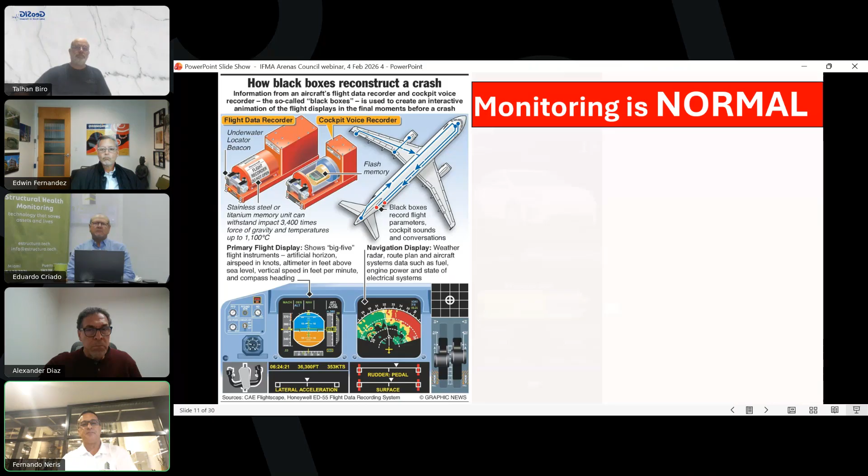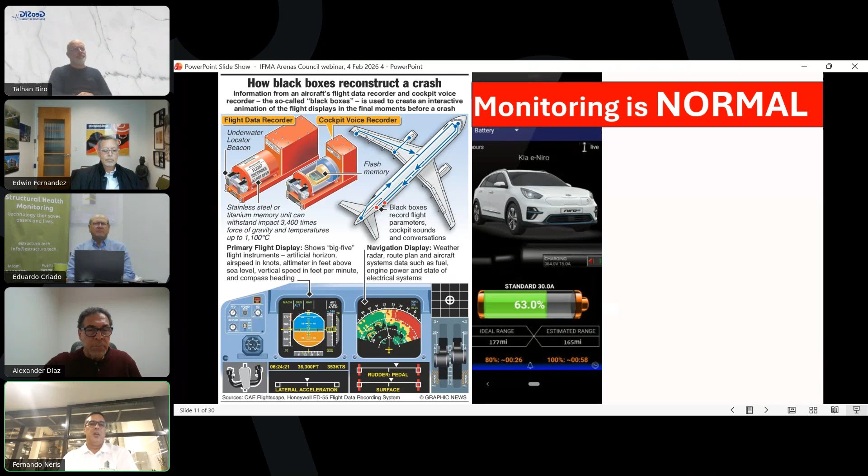And then automobiles, the same with automobiles. You're driving your car to the grocery store or on a vacation with your family. You want to make sure everything is good. Your tires, your oil temperature, water temperature. These cars are now monitoring everything that's going on. And why do you do that? You want to be safe.

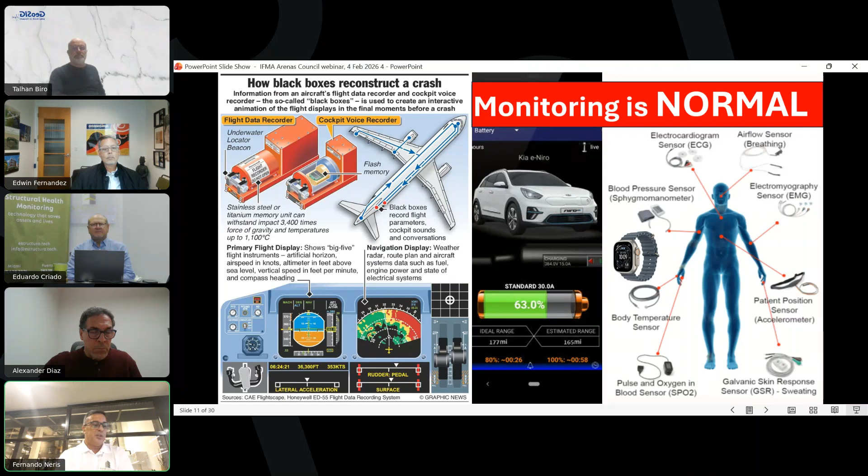And now us humans, we all wear watches. We have rings. They detect oxygen levels, stress, your heart rate. Why? Because you want to maintain your health, you want to be healthy and last longer. So what we want to introduce to you is that we do have a way of monitoring one of your biggest assets, your venues, your buildings, your bridges, dams, and practically any type of infrastructure. So that's what we're presenting here.

And then here's a video of our capabilities.

Can you guys hear the volume? No, we can't hear the volume. Give me 1 second, folks. This is Kylie, let me see if I can make the sound work. Give me 1 second, please. Thank you. Okay, I'm going to try one more time to restart the video and see if the sound works, okay? Let me know.

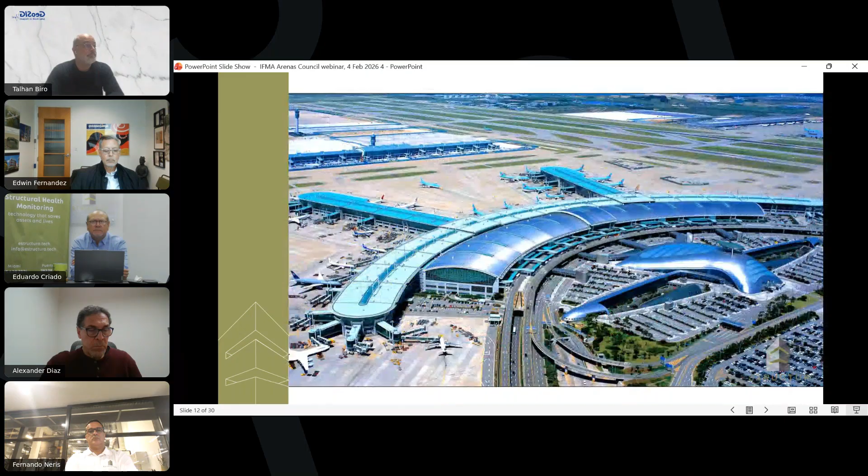Delivering modern technology to the Americas and Caribbean that has been used extensively around the world for over 30 years. This technology is a call to action for our aging infrastructure. Structura has the privilege of being chosen as a platinum partner to the world-renowned GeoSig, a Swiss technology corporation. GeoSig provides structural health monitoring equipment for new and aging structures, from residential to commercial buildings, bridges, dams, railways, government facilities, hospitals, hotels, historical landmarks, mines, airports, nuclear power plants, and scientific equipment across 7 continents and 60 countries.

Structural health monitoring utilizes sensors to detect an exceedance of allowed performance while identifying and verifying structural behavior. GeoSig's revolutionary Swiss technology provides immediate response, with each sensor having a minimum sampling rate of 50 samples and calculations per second. You truly get a real-time view of the structure.

With such a high sampling rate, the system responds immediately to any changes in the structure. Notifications: audio and visual alarms can be installed inside a structure for occupants, and email notifications can be sent to management when critical changes in a structure are detected. These urgent notifications can literally save lives.

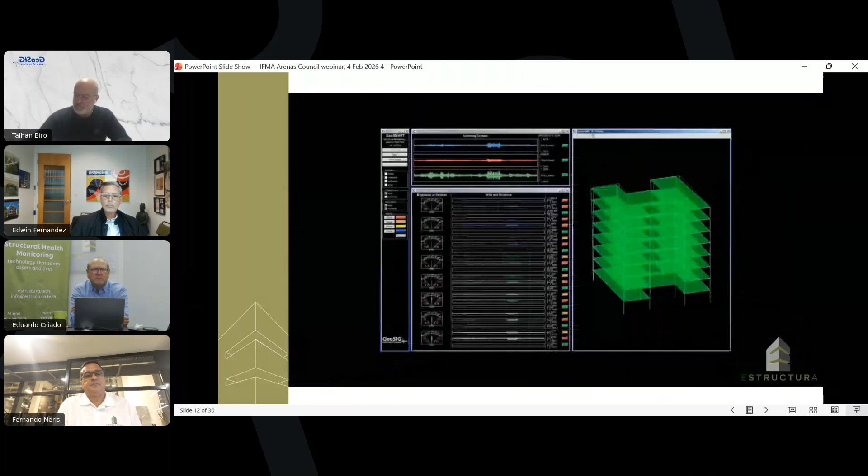Building integration: our equipment can be tied into building management systems so that responses to structure change can be customized to turn off at-risk critical services like utilities and elevators, or open electronically locked doors for ease of evacuation. Reduction of repair costs: early indications of potential damage allows for predictive maintenance versus preventative or reactive maintenance, lowering costs throughout the life of the structure and potentially extending the life of the structure itself.

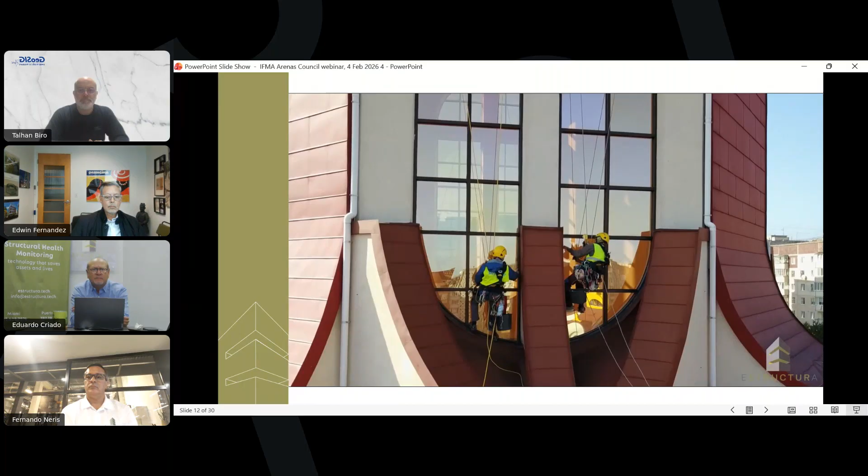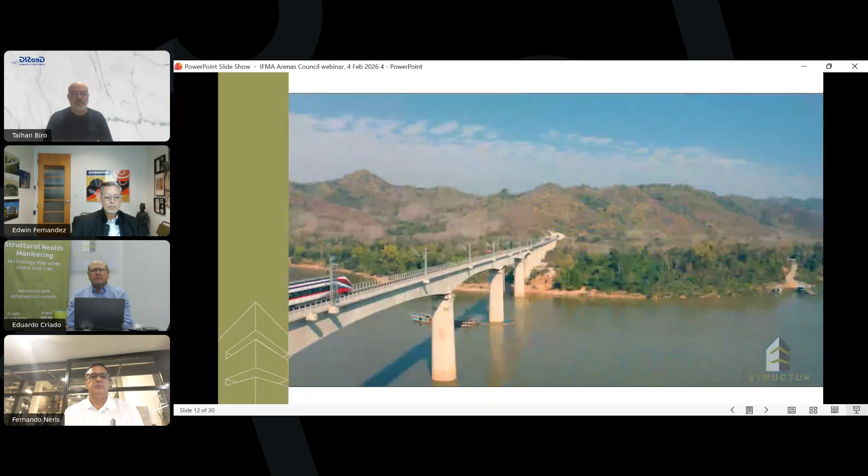Mapping of multiple properties: properties with multiple structures like schools, hotels, and residential or business campuses can be monitored on a single system from anywhere in the world. Satellite comms and solar backup: GeoSig equipment and software can protect even the most remote locations via always-on satellite connections and solar power generation.

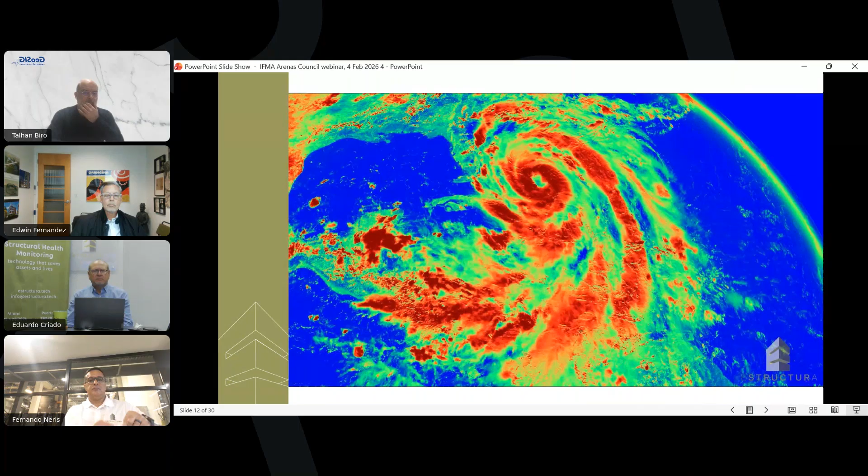These satellite connections also serve as a backup for critical infrastructures like hospitals when threats like hurricanes and earthquakes are ongoing. Conclusion: as Florida wrestles with mitigation strategies to avoid another building collapse like Surfside, Estructura's tools provide continuous data on structures subject to the effects of sea level rise, especially in highly salt-prone coastal regions. Even lapses in governmental inspections, or simply the natural passage of time, can play a role in structural safety, so it is imperative that owners and residents utilize every tool available to them.

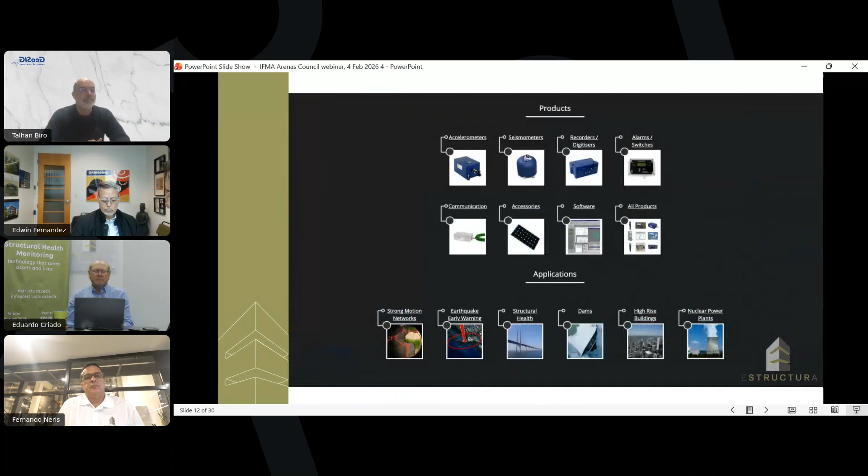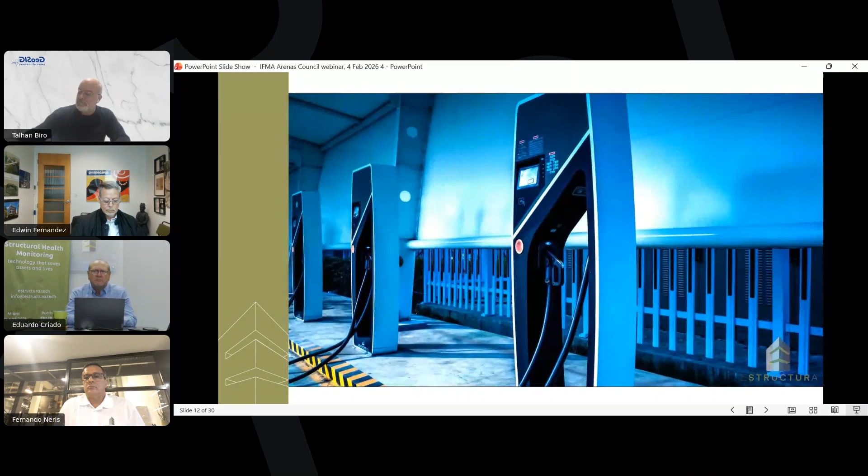For example, emerging research has noted that electric cars are about 50% heavier than traditional gas-powered models. As electric vehicles become more prevalent, they will pose a direct structural threat to both multi-story and underground parking garages. Estructura provides our clients peace of mind with custom solutions that offer an affordable way for commercial and residential customers to reduce risks, lower costs, avoid disasters, and save lives.

So basically, we wanted to also inform you that we have a collaboration agreement with TerraIntel. Dr. Manu, who is a world-renowned scientist, works with subsidence of the soil and the ground. He's got access to satellites that have been up since I believe 2022. They are constantly surveying the entire Earth.

So we've been able to consult with him, with our clients, to not only give us a history of how the structure has been behaving, but also the ground around the structure, so that you as an owner or a manager can use this data with your consultant and figure out if the subsidence is part of what's causing the problems with your structure, or if it's not, or if there's something else that we have to look at and help.

So we're trying to be a one-stop solution for you as a client to help determine if there's anything wrong with your facilities. So before a disaster, we could give you all the information. During a disaster, let's say if it's an earthquake or hurricane or a tornado, we could tell you if the building or the structure is fine for occupation, or if you have to shut it down.

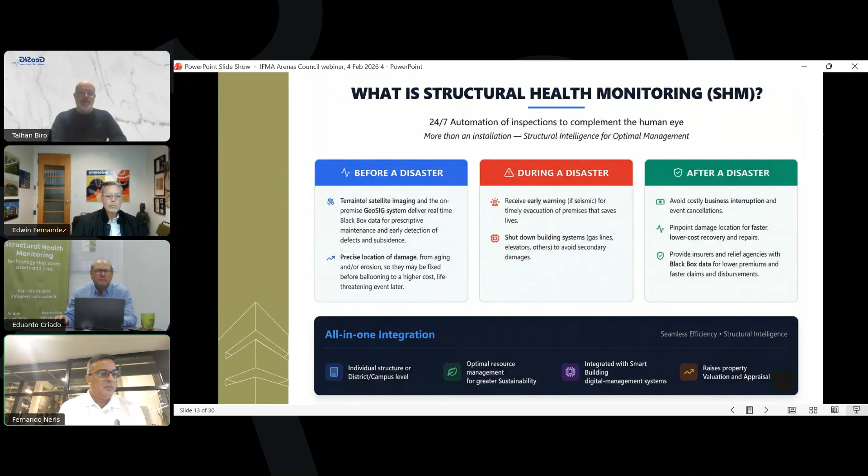Next one. Yeah, so with TerraIntel, as you can see here on the slide, we could help you with multiple structures and facilities, especially stadiums and complexes. At the end, I will show you a case study of the Coliseum here in Puerto Rico, of an actual report that we got from the system and some data and how we used it.

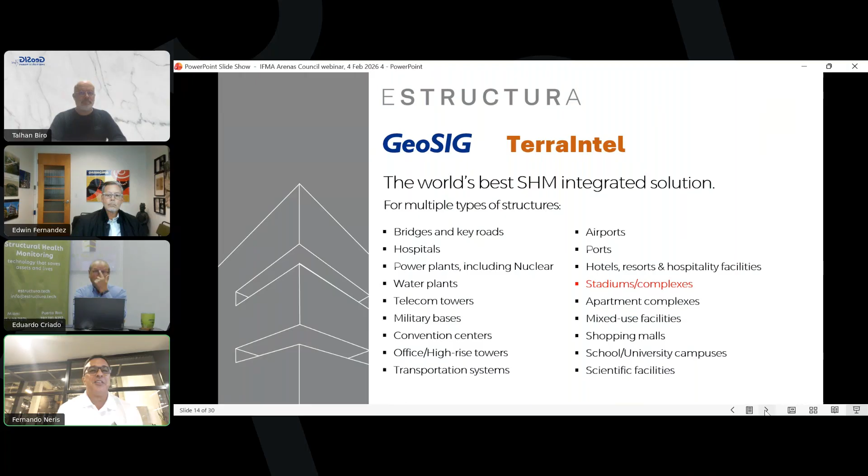And now we'll have the man himself, the creator of this, Dr. Talhan Biro.

Thanks a lot. Thank you, Fernando.

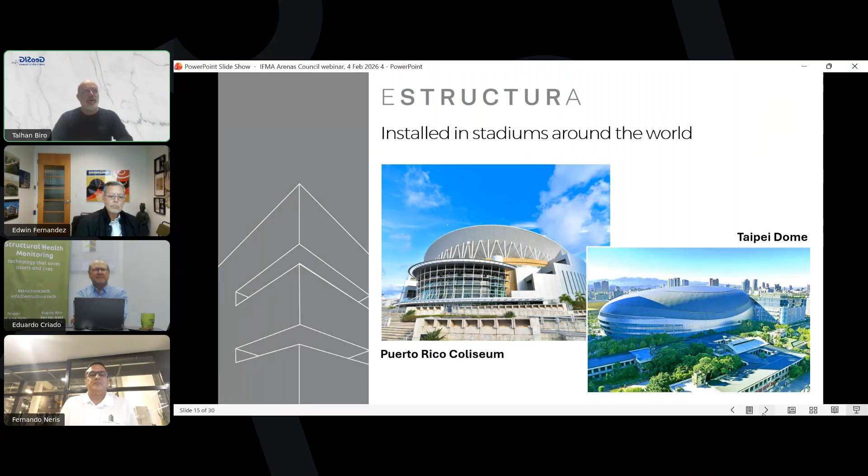I'd like to follow up with what has been presented up to now and take the next few minutes to talk about something we rarely think about: what our structures may tell us and how we can listen to them. Before we talk about technology, let me start with who is behind it. GeoSIG is a Swiss developer and manufacturer of precision measuring solutions with more than 30 years of experience in measuring what most people cannot see: earthquakes, seismic activity, structural behavior, and industrial vibrations.

Over 3 decades, we have built systems that operate in some of the world's most demanding environments, such as nuclear power plants, supported by a global partner network. This background matters because what we are about to discuss is not an experiment or a concept. It's a solution that is the result of a long-term experience in critical monitoring, where accuracy, reliability, and credibility are essential. With that foundation, we introduce our solutions, not as gadgets, but as tools that are fit for the job.

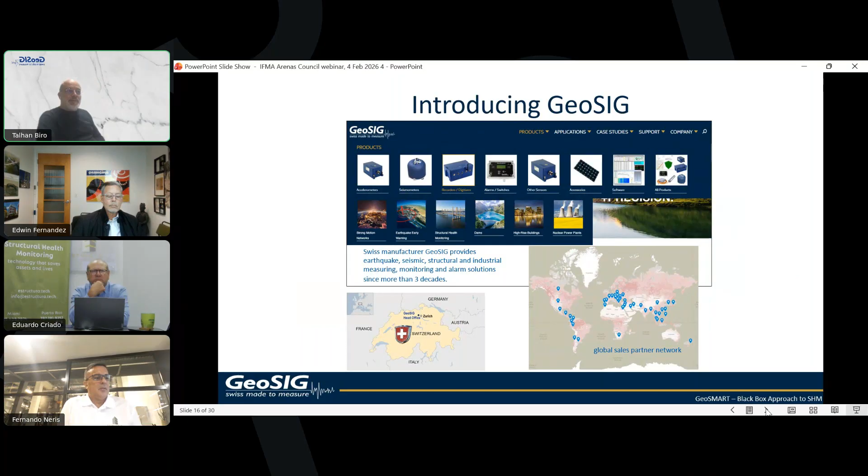One of the key contributors to this safety revolution is the black box, known as the flight data recorder. Why? Because aircraft are never silent. They continuously record data, detect anomalies in real time, and critically provide objective insight after an incident. This data doesn't just explain what happened, it helps prevent the next failure too.

So the question becomes: if black boxes transformed aviation safety, why don't we have an equivalent for buildings and structures? Here is the uncomfortable truth. Most civil structures are silent. Unlike aircraft, structures have no black box.

When a significant event happens—an earthquake, strong wind, man-made impact, sudden failure due to aging—decisions are often made with no objective data. Assessments can be subjective, slow, and may take weeks or months. Even worse, many of the dangerous issues may be invisible.

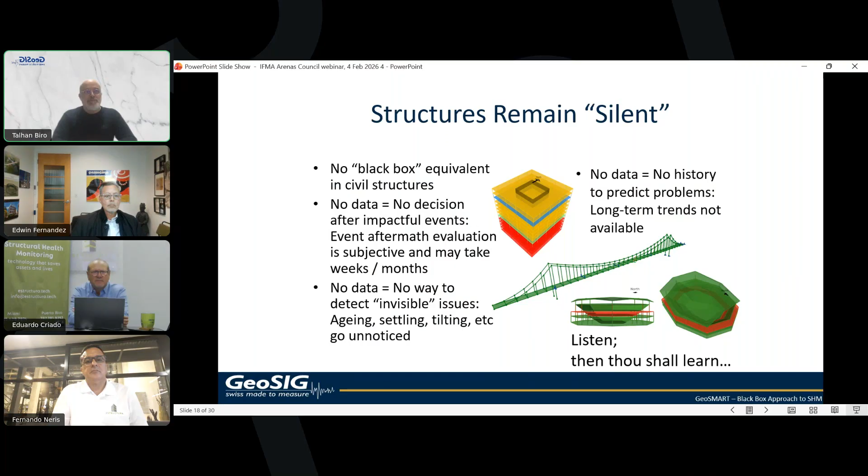Aging, settlement, tilting, stiffness loss, changes in dynamic behavior—all these develop quietly, without alarms, without history, without trends to guide decision-making. No data means no memory. No memory means no learning. And without understanding and learning, we cannot predict or prevent failure. That's why this slide ends with a simple message: listen, then thou shalt learn.

This is where GeoSmart comes in. It is designed as a structural black box with real-time alerts, continuously collecting data, continuously analyzing it, and learning from it. It monitors not just one parameter, but a comprehensive set: accelerations, displacements, frequencies, response spectra, rigid body motion, interstory drift, rotation, tilt, wind, and ambient conditions—name it. All of this data is stored locally or in the cloud, creating a long-term structural memory.

On top of that, GeoSmart applies AI-powered entropy and anomaly detection to identify both sudden events and gradual changes. Note that there is an important design philosophy here: GeoSmart delivers simple, intuitive information for ordinary people while preserving complete expert-level data for engineers. This is not about overwhelming users with graphs. It's about making structures understandable.

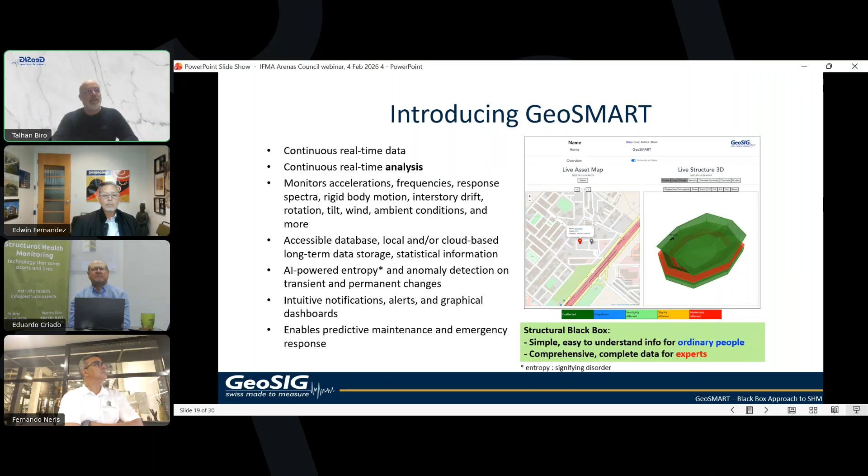The next question is scalability. It is built to be automated, scalable, and affordable, making structural health monitoring viable not just for iconic landmarks or buildings, but for every structure, including arenas, stadiums, and large venues.

The system produces clear outputs and factual action plans, which is why insurers and regulators increasingly encourage this approach. It doesn't just observe, it can trigger real-world actions: alarms, messages, relays, sirens, open doors, valves, or remote notifications. In other words, the system doesn't end at data, it connects monitoring directly to operational response.

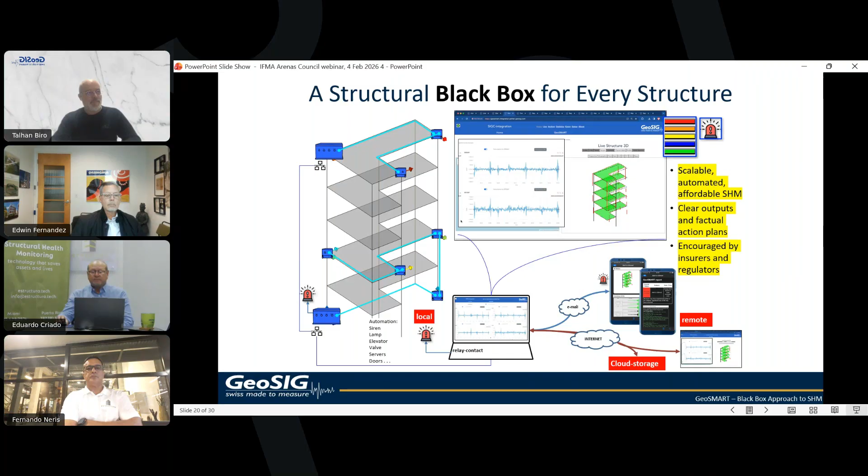GeoSmart follows a simple life cycle: design, deploy, and operate. During design, sensors are strategically placed based on the structure's geometry and characteristics. During deployment, the structure is represented digitally, creating a live 3D reference model. And during operation, the system continuously records, analyzes, and visualizes data in real time. This is not a set-and-forget system. It becomes part of daily operations, quietly building up intelligence in the background, ready when it's needed the most.

For operators and facility managers, clarity matters more than raw data. GeoSmart's web interface presents information visually and intuitively, with color coding, simple maps, and 3D models. When something happens, the system doesn't just raise an alarm, it delivers a clear action plan. Messages are written in plain language, alarms are clear-cut. This means faster decisions, reduced uncertainty, and safer outcomes, especially during stressful events when time is critical.

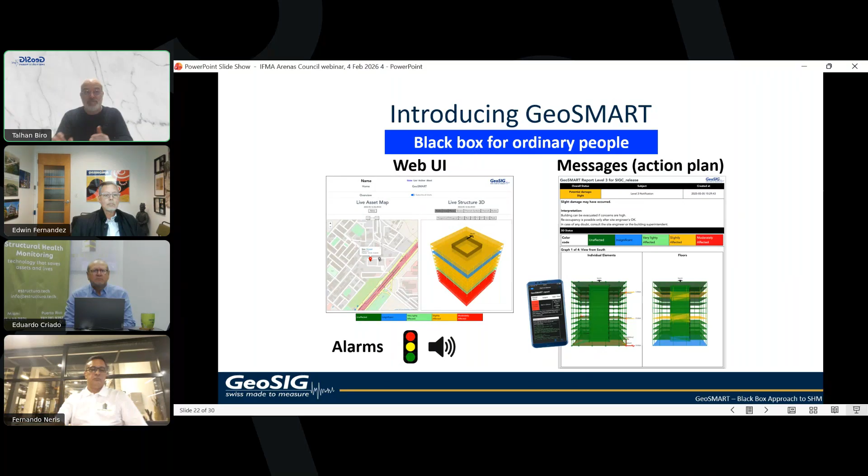For experts, at the same time, the system does not simplify by hiding information. For engineers and experts, it provides full access to raw data, waveforms, frequency content, and statistics. Event reports are factual, traceable, and defensible, essential for post-event analysis, regulatory reporting, and insurance discussions. This dual-layer approach ensures that everyone gets exactly the level of information they need without compromise.

Moving forward, finally, let's talk about intelligence. GeoSmart uses machine learning, specifically a random forest algorithm, to create a behavioral model of each structure. It learns what normal looks like and detects when behavior changes. It does not follow a single decision tree, but compiles and extracts from a forest of many possible trees.

It distinguishes between transient anomalies, like short-term vibration changes, and permanent anomalies, such as shifts in baseline frequencies or stiffness loss. By analyzing both time-based and frequency-based features, including entropy, a measure of disorder, the system moves from simple detection to prediction and prevention.

In essence, the structure is no longer silent—it speaks, and GeoSmart listens. Just as aviation became safer by listening to aircraft, our structures and arenas can become safer by listening. GeoSmart is not just monitoring, it's structural memory, intelligence, and accountability. It is smart monitoring. Thank you.

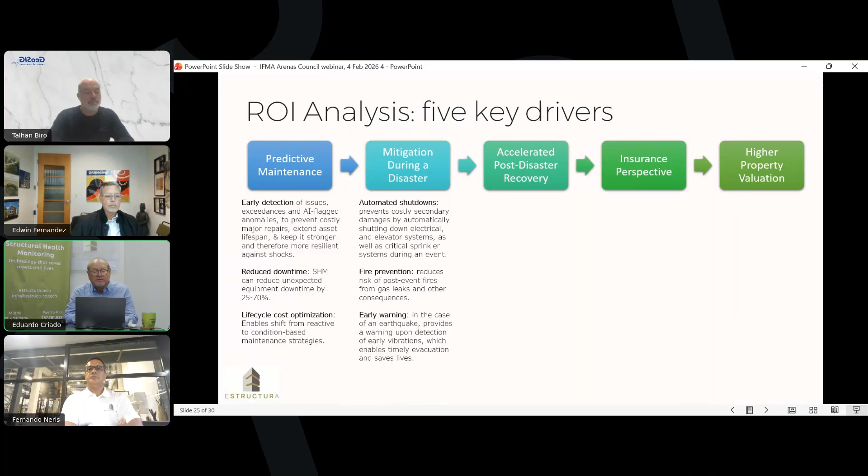Number two, mitigation during a disaster. It allows for automated shutdowns and enhanced building management systems by providing immediate real-time verification of structural behavior, supporting effective emergency evacuation procedures and minimizing costs associated with false evacuations. It's a critical component of any business continuity and resiliency strategy.

Number three, post-disaster recovery, can optimize repairs by identifying specific areas of damage, providing better data to settle the insurance claim. This drives me to the fourth return on investment driver, the insurance perspective.

The impact of insurance: the number one thing it does is underwriting consideration, primarily from the risk profile perspective, and eventually you could get premium discounts.

Traditionally, insurance underwriters assess risk and determine premiums based on factors such as COPE: construction, occupancy, protection, and exposures. Insurers usually reward policyholders who mitigate risk with smart building technologies that enhance safety and security, like advanced surveillance, detection, and fire prevention systems, which are increasingly recognized for potential premium discounts ranging from 5 to 20%. The other component in the insurance sector is claim resolution, providing both parties with real data on the structural damage to properly adjust the loss.

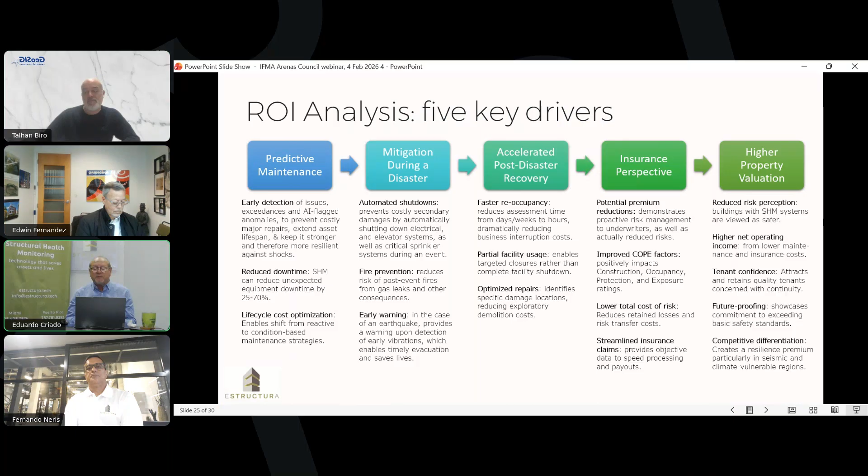Back in 2024, Bad Bunny ended his world tour in San Juan at this Coliseum. He had a 3-day mini residency with concerts there. The management wanted us to analyze how the structure behaved during those concerts, because he was already announcing his residency of about 35 to 40 concerts in a row over about 10 weeks. So we sat down and analyzed the data.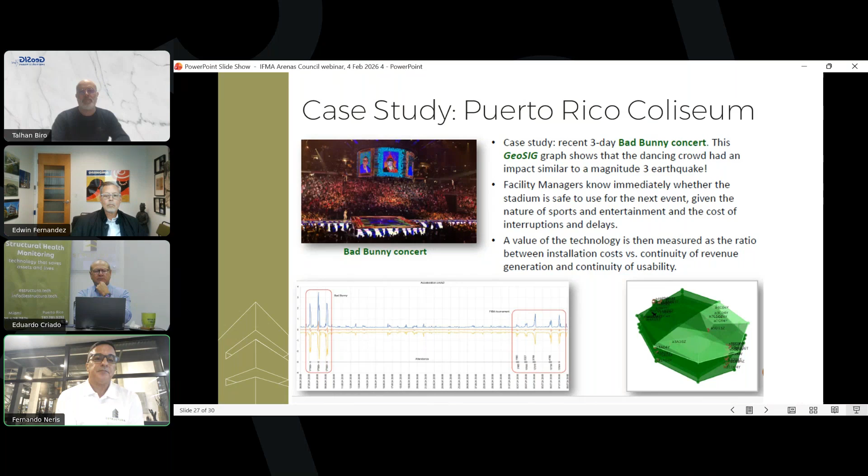So what it was showing us is that something happened on the roof. We went back to the time, analyzed the data, and noticed that at the time of this alert, it was raining almost 1 inch per hour. The winds at the stadium, because we also installed a wind sensor due to hurricanes and different events, were over 55 miles an hour.

So the system sent us a warning that the roof had received a change of load, presumably from the rain and from the wind. So we informed the stadium.

So what they did is they did maintenance on all the rain gutters. I think they're looking into maybe adding more gutters or making them bigger, because the rain events now, the stadium's already 20 years old, so the data and the requirements back 20 years ago are much different than the rain events we're receiving here in the tropics. So this is a great example of predictive maintenance that our client received, and they were able to make adjustments. I don't think we've received one since from a rain event.

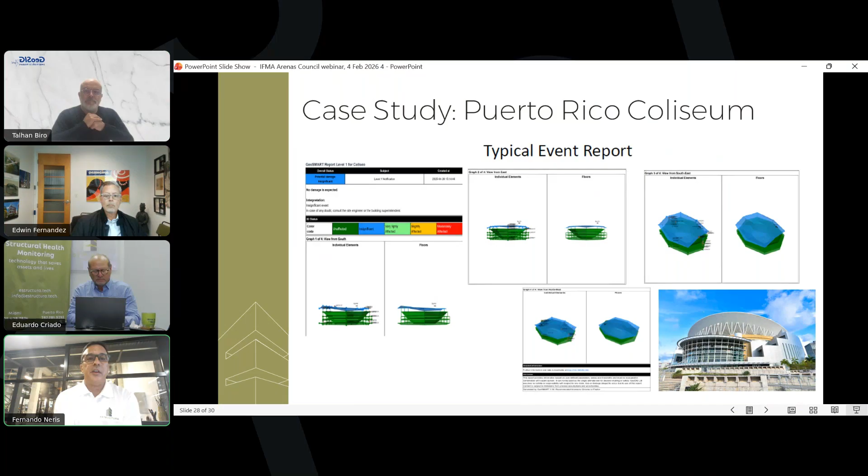Okay, you can go to the next one, Edwin. As we come to the end of the presentation, gentlemen, what we're looking to do is make sure that everybody's very informed and knows that this technology is available and how it can make a difference to your particular structure. As a matter of reference, last year we were invited to a summit in Saudi Arabia regarding stadia specifically.

And basically, we have all these layers of new technology that are pretty amazing, from managing waste to electric, better usage of the electric grid, so on and so forth, one layer on top of the other, which is magnificent, it's fantastic. Most people don't realize that we now have an option that can monitor everything that these layers are built upon: the actual structure itself.

So now we can offer the same level of forensic data that can help you with your structures, not just advancing technology, but protecting it as well with our system. And we also like to share with you that the path forward is pretty simple, in the sense that all we need from you and your facility are drawings of the actual structure, whether it be architectural, engineer, or elevation drawings. That has no cost effect to you at all.

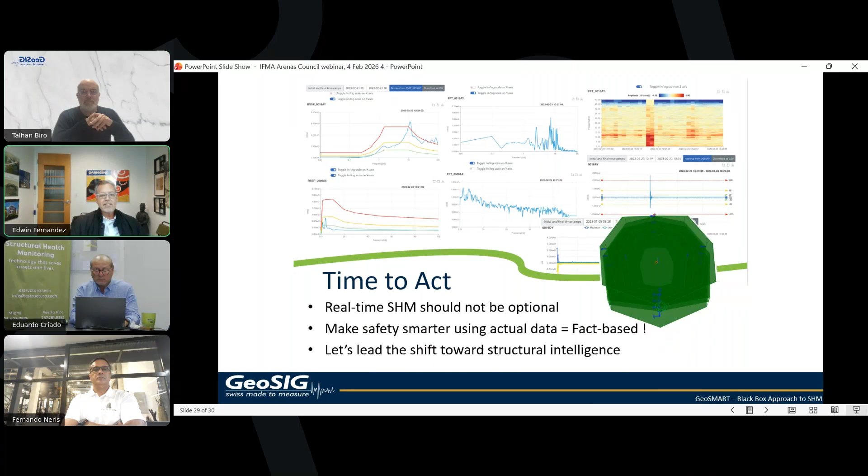And with those drawings, we can provide a full order of magnitude. We can provide a formal proposal for your specific structure that will allow you to see the multiple benefits that the system can bring to your specific structure. So with that said, please make sure you send us your inquiries, your drawings, and we'll respond promptly with a specific proposal for your structure.

But again, one of the most important things to our organization is to get the message across, not only that you install our system, but that you know this technology is available. So please help us with the educational factor, spreading the word that this is available so no tragedy can happen again, ever. Thank you.